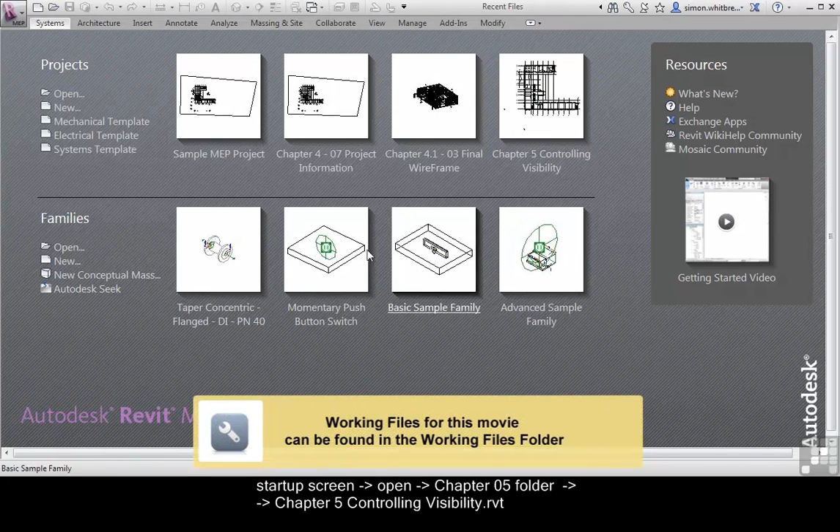From the Startup screen, click on Open and browse to your Chapter 5 folder and open up Chapter 5 Controlling Visibility. This model is loosely based on an earlier exercise.

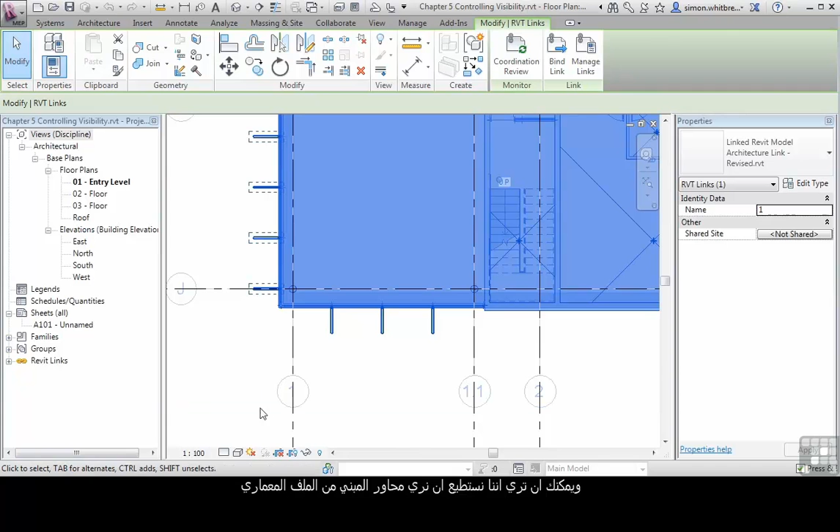Here you can see that we've created floor plans that are linked, and you can see that we can also view the building grids from the linked file in a halftone.

So the main way of controlling visibility in this view, or in one of the elevations, is to use Visibility Graphics. From the View tab, click on Visibility Graphics and we get the dialog box.

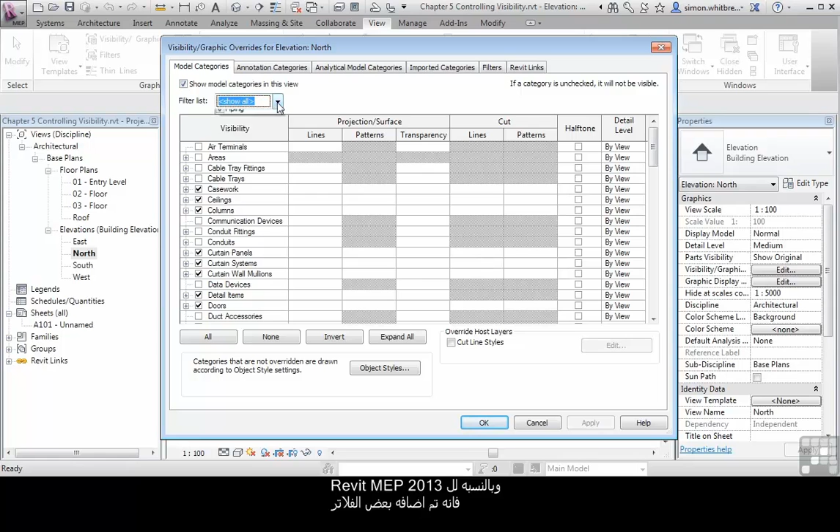Here you can see all the model categories, and for Revit MEP 2013 we've been given some additional filters, so we could uncheck all the services and only see the architectural categories.

So in this view, for example, I could scroll down and turn off parking and planting. Click on OK, and that removes the trees from this view.

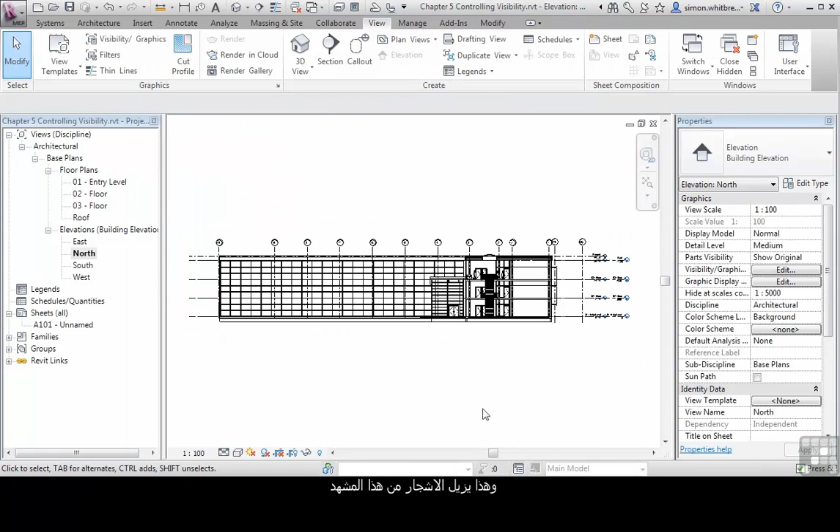Back in Visibility Graphics, I also get the option to control annotation categories. So again, I could go through here and select, say, levels and grids and turn them off.

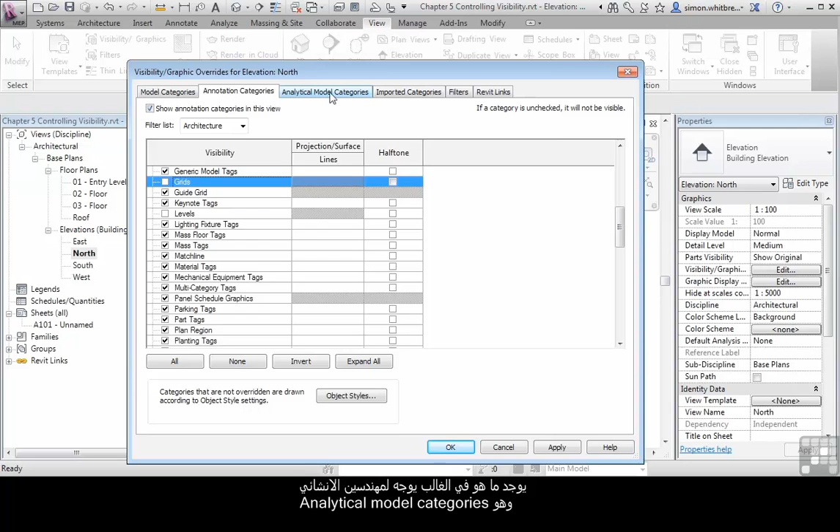Mostly aimed at structure, we have analytical model categories, which don't show up unless we have structure on. We also have imported categories, so whether we have point clouds imported, or imports from families, or any linked DWGs, they will appear in this box.

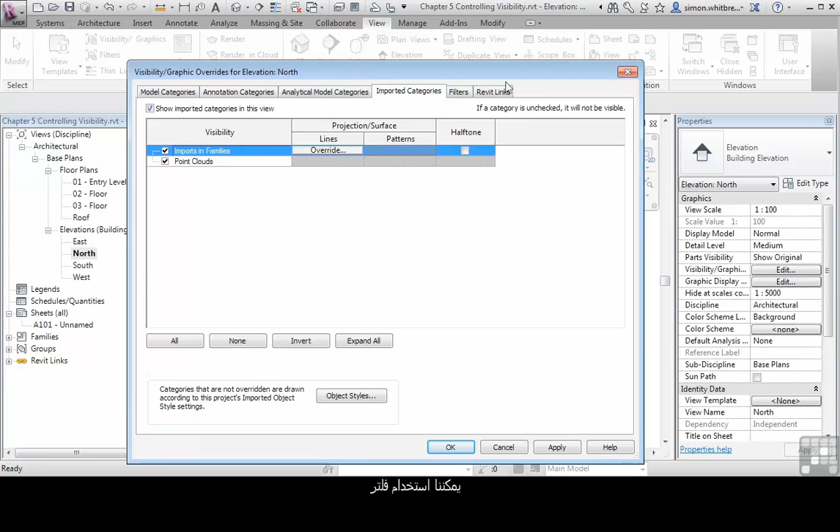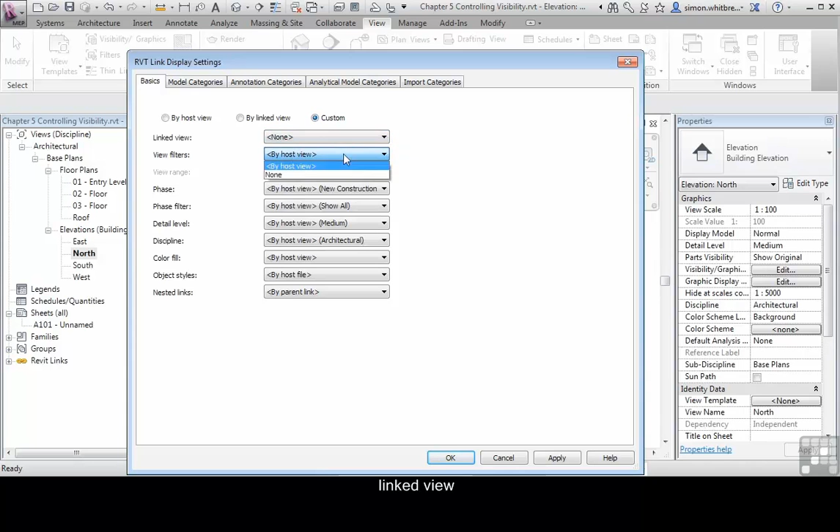We can apply filters, which we will be looking at in more detail later on, and also the Revit links. By default, the properties of any linked file is determined by the host view, but what we can do here is customize this and select either a linked view, view filters, its different phases, or what we can actually see in that view from the linked file.

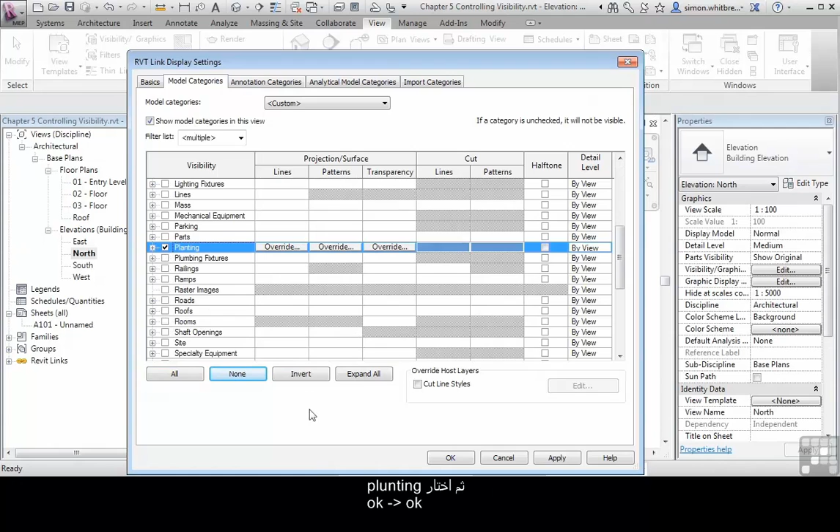So let's say we only wanted to see trees. I can select all, then click on Select None, and then pick on Planting. If I click on OK, and OK again, we'll only see the trees from that linked file.

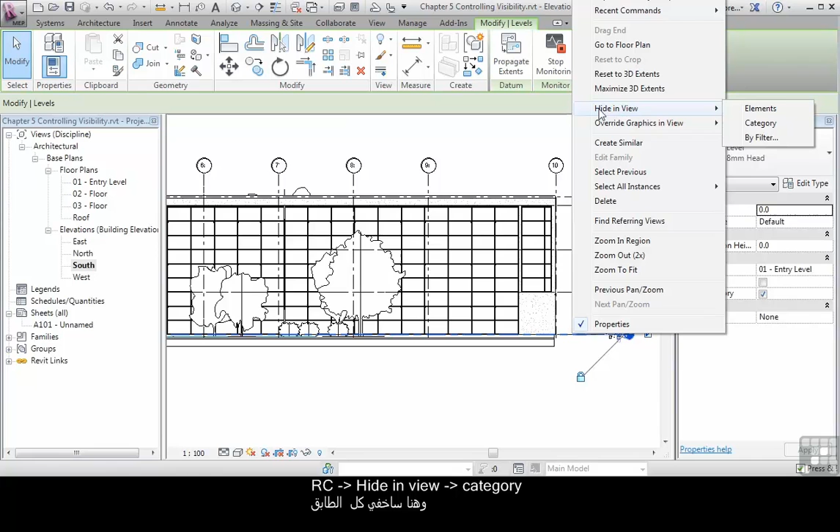Let's take a look at the south elevation of the building. And just because I can, I'll select one of the levels, right-click on it, and hide that level in the view. Here I can choose whether I want to hide the category or just that one element. We will see this in much more detail in future videos.

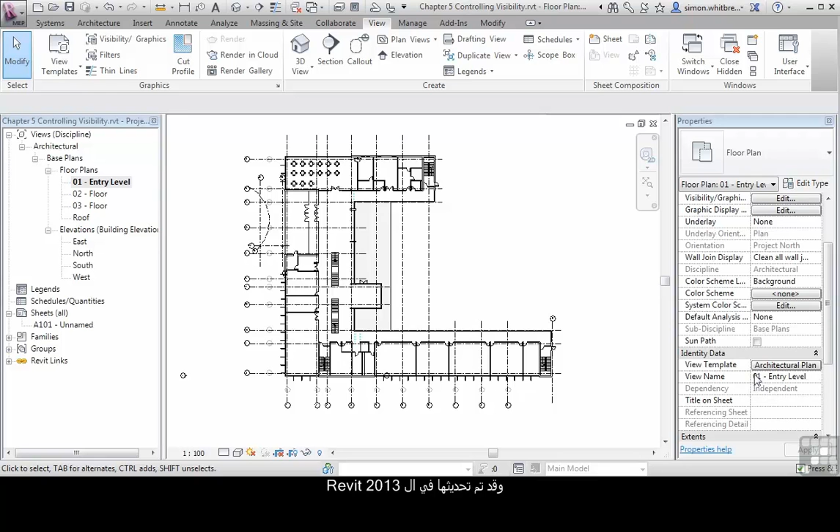Going back to the floor plans, if I open one of the floor plans and look in the Properties palette and scroll down, you'll see that we have a view template. View templates have been updated in Revit MEP 2013, so that if this view template is associated to the view, I can control the properties of that view from the view templates.

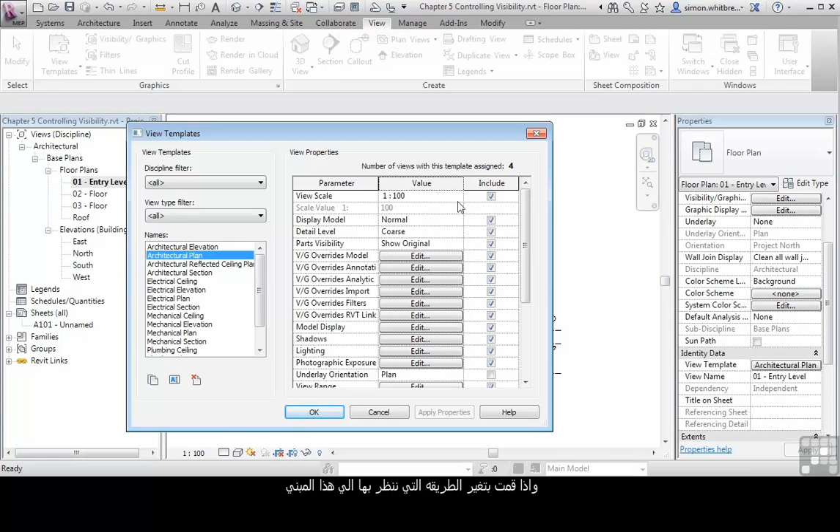There I have my architectural plan, and if I change the way that we look at that plan, whether it's by changing the scale or any of the other properties, it applies those changes to all the plans that have the architectural plan view template.

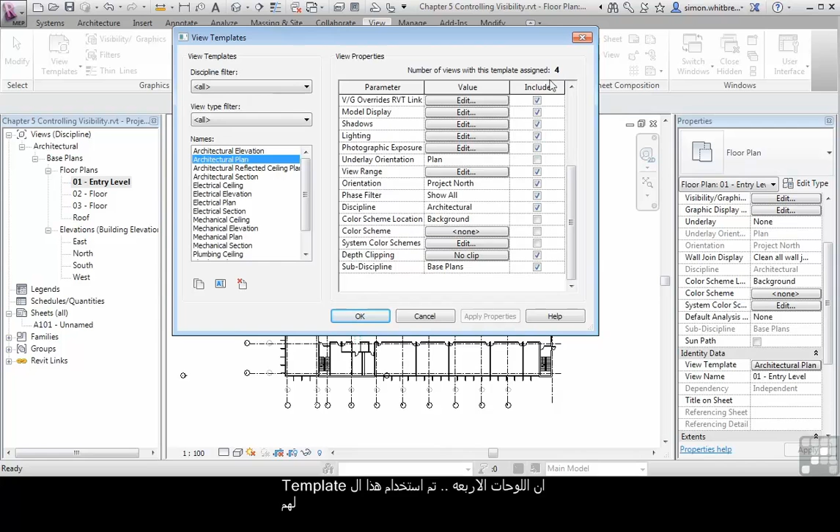In the dialog box, it shows us that 4 views have this template assigned, so they will all be updated to be at the scale 1 to 500. If I change it back, it changes it on all of them.